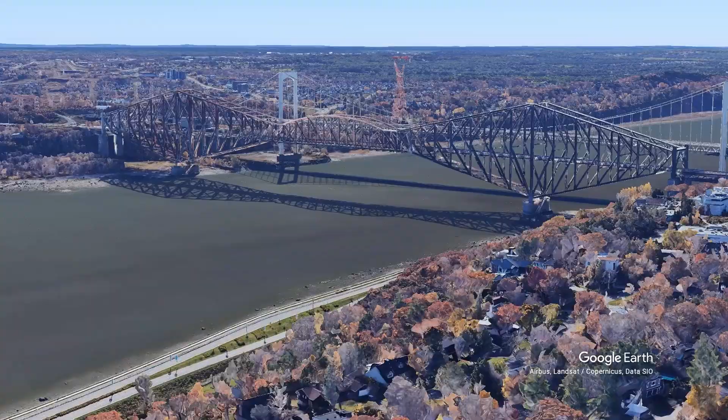Today, it is one of the major cities in the province of Quebec and Canada, with a population of 800,000, and is the centerpiece of Quebec's economy and tourism. A steel bridge has been proposed to span the St. Lawrence River between Quai Frontenac in Quebec City and the city of Lévis. Although the existing Pierre-Laporte Bridge and Quebec Bridge already connect the two cities, this new bridge is intended to meet the demand for improved pedestrian and cyclist access to the Old City and the promenade Samuel de Champlain from Lévis.

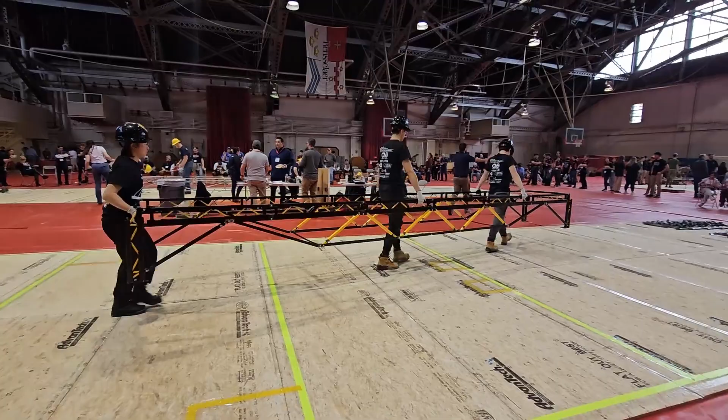The view from the bridge will show the St. Lawrence River with the picturesque backdrop of the Old City. The bridge construction must also consider the unique ecology of the St. Lawrence River. The University of Waterloo Steel Bridge Design Team has been tasked to build a steel bridge connecting these two key locations. Established in 2014 with 4 awards and 7 competitions under its belt, the University of Waterloo Steel Bridge Design Team is at the forefront of innovation in this field. Together, the design, construction, fabrication, and PR and finance sub-teams collaborated throughout the year to submit the design proposal for the Canadian Student Steel Bridge Competition.

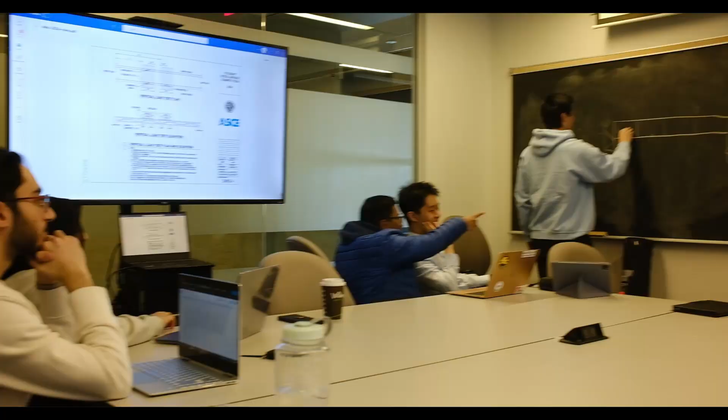The first step in our design process was to look at the site constraints. We then looked at bridge designs from previous years that might work well with those constraints and modeled them in SAP 2000, our structural analysis software, to understand why these bridges worked well and what their shortcomings were. We adapted elements from different bridges to create a design that had the lowest deflection and was simplest to construct. We then iterated on those designs based on our SAP 2000 analysis. We then used Excel to optimize the section design and sizes of steel pieces and check for failure. Once the final design was decided on, we completed our detailed design modeling using Solidworks.

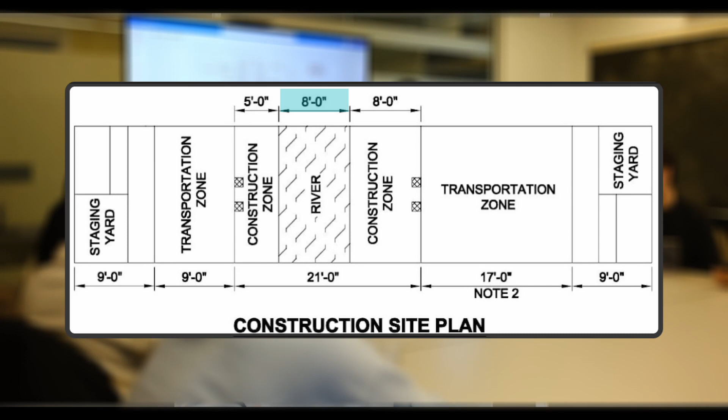Our bridge design is a response to the constraints that were inherent to our site conditions, such as a wide river, an asymmetric site, and a limited envelope. The bridge envelope limited us from including a large arch, and the site obstacles required us to design a bridge, especially the connections, around ease of constructability. The most prominent features of this bridge lie in the design aspect. The bridge uses sturdy truss members capable of supporting themselves as a top chord for ease of constructability. A second under truss maximizes use of the available depth in the bridge envelope.

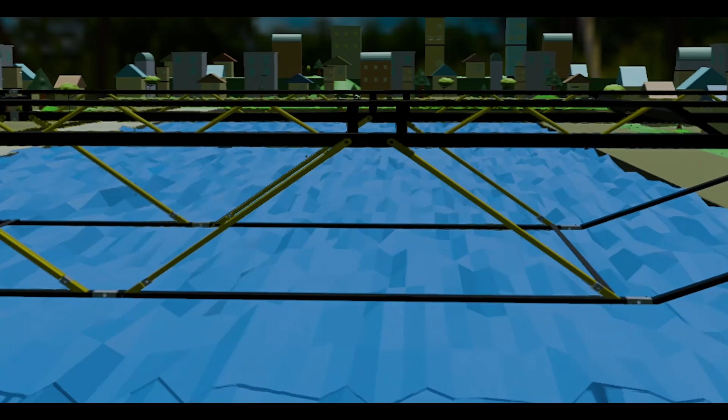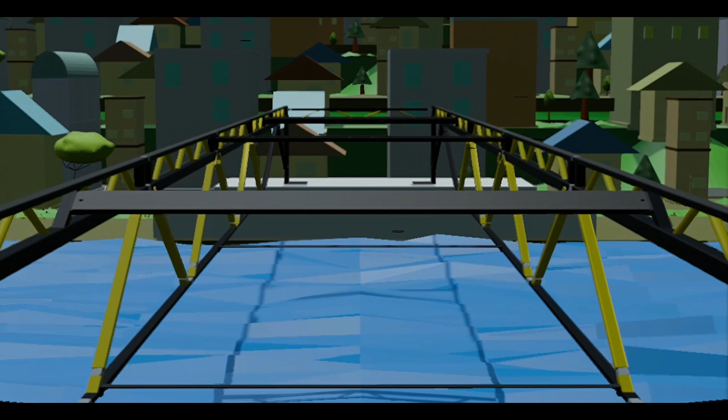The design of the top chord in terms of increasing moment of inertia is, first of all, identifying what we want to improve under the envelope restriction that doesn't allow an arch. We decided to rotate the stringer, resulting in a wider horizontal section which increases the moment of inertia during lateral loading. Moreover, the combination of knee braces and outrigger truss legs shortens the effective span of the bridge, which reduces deflection for the entire structure.

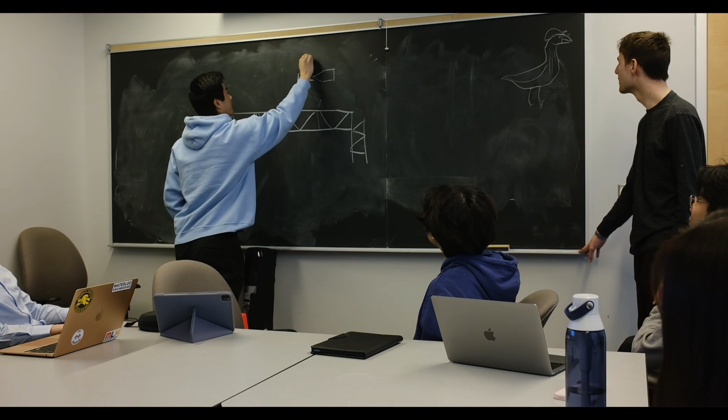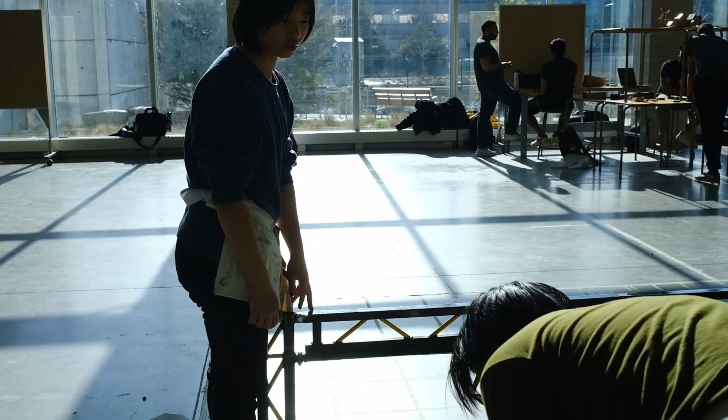The highlight of this year's bridge design is the main connection for the stringer. It features a tongue and groove connection for ease of constructability and a double shear connection for extra strength. The double shear connection has 2 shear planes running through the bolt, resulting in double the load capacity of the bolt. This design also resists bending due to the angle that acts similarly to a moment connection.

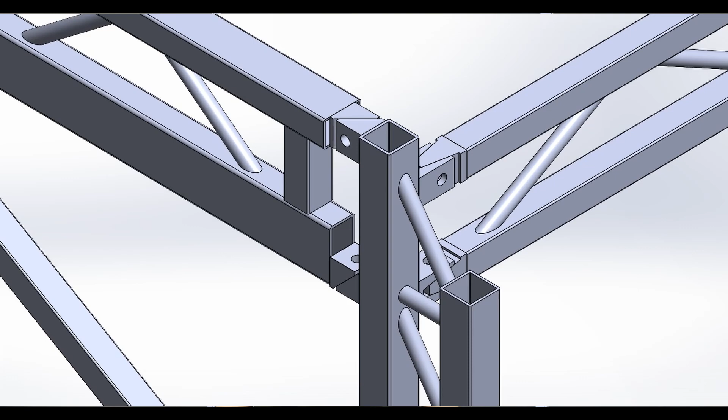The connection of our bridge is also very important in guaranteeing ease of constructability. Our wedge connection design is optimized for strength while also being very simple to slot in from a distance, while our improved triangle connection from last year is easier to align in areas with tight fits. Lateral and under truss connections were designed with crush tubes to prevent damage during assembly. Our bridge also uses wide leg plates, allowing builders to leave them freestanding during the initial periods of construction.

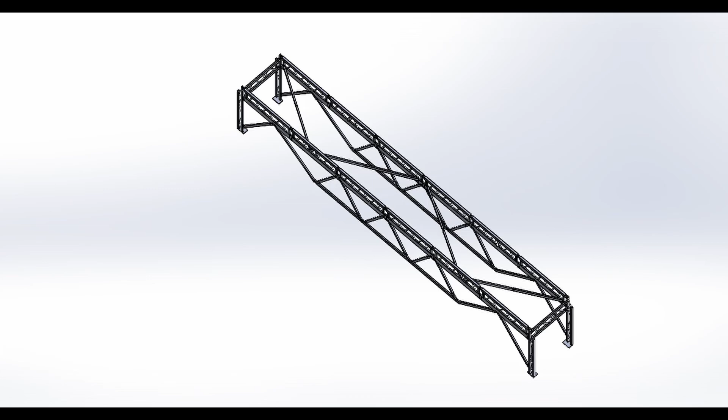Our construction process takes place with 2 builders on one side of the river, 1 on the other side, and 1 in the middle, which helps make connections over the river easier. The builder in the river assists the solo builder. Some pieces needed for the main truss are passed over from the other side of the river to the solo builder via the river builder to prevent them from having to let go of the structure. Once the first side of the bridge is installed and is standing freely, builders on both sides are able to assemble the under truss in a similar process and then finally add the lateral members.

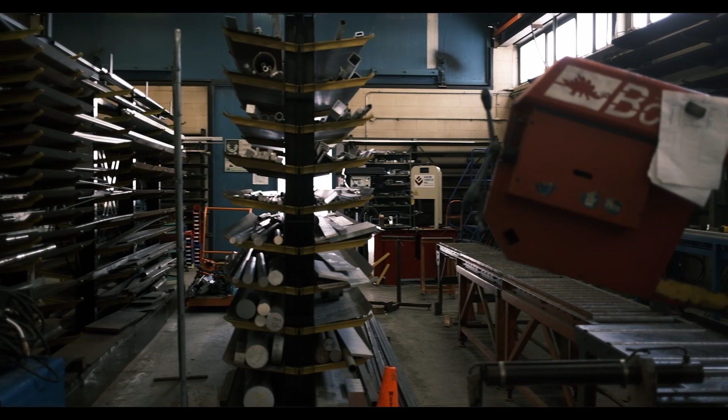After completing and testing our design, we then moved to fabricate the components of our bridge through the university's very own engineering machine shop. All detailed designs were drafted in-house, and the materials were ordered from local businesses to maximize efficiency. To fabricate our bridge, a water jet was used to create clevises and connections.

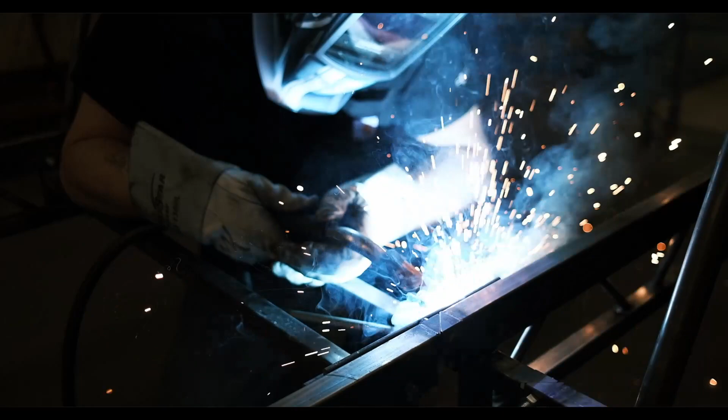This involved taking a 1-inch thick plate and using a water jet cutting machine to precisely cut out the shape. With this water jet technology, less material was wasted compared to typical subtractive manufacturing, as the cutting process can be optimized to closely fit the clevis shapes on the plate. It also allowed for precise cutting and enabled us to meet proposed designs with high accuracy.